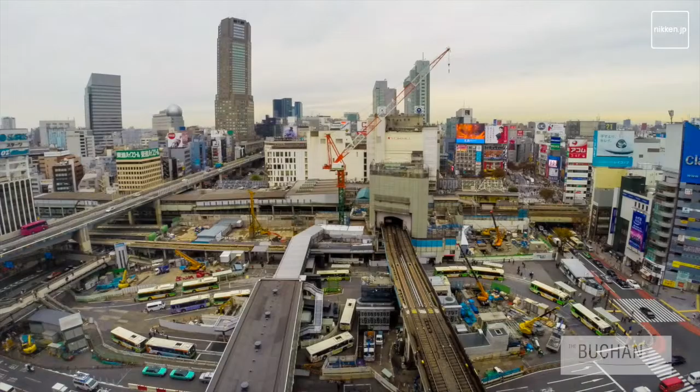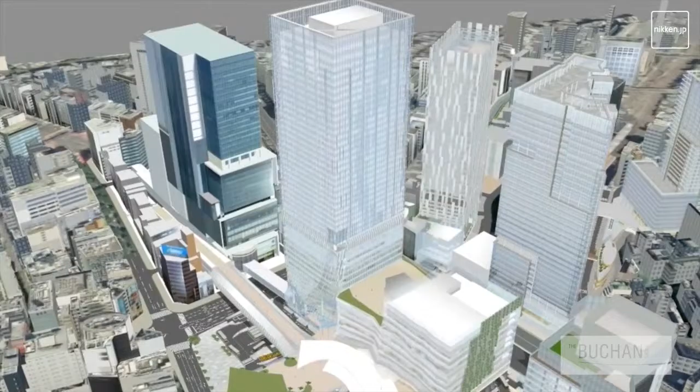Complicated topography that makes the land difficult to use, the disorderly streetscape, and the need to share the project concept among related people and reach consensus have become major challenges. In the vicinity of Shibuya Station, 5 districts centered on the station area will be developed one after another. This redevelopment project includes a high-rise building next to a huge urban plaza, crisscrossed with railways, roads, a river, and an underground shopping area.

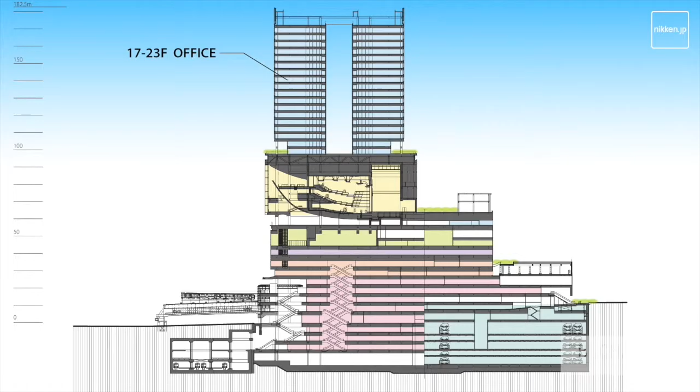Shibuya Hikarie is a facility that serves as a symbolic landmark. Shibuya Hikarie comprises a number of blocks, 17 stories of offices, a 2,000-seat musical theater, exhibition hall, and more than 200 shops and restaurants. By stacking these different blocks on top of each other, we have created a kind of vertical city.

Hikarie connects directly with Shibuya Station, which is one of the biggest stations in Tokyo. About 2.8 million passengers use this station each day. In front of the station, about 500,000, mostly young people, cross every day. In Shibuya, within a very small area, there are many different entertainment, office, and commercial facilities, as well as creative industries. The diversity of these elements has inspired the creation of a new subculture.

At nighttime, you can easily see the overall constitution of Hikarie and its bustling in-between spaces. Office and theater are located at higher levels so that a shower effect for retail and restaurants can be expected. Shibuya is located at the bottom of a valley built along the terrain. This is Shibuya Station, and here is Hikarie. There is a 30-meter vertical interval from the bottom to the top.

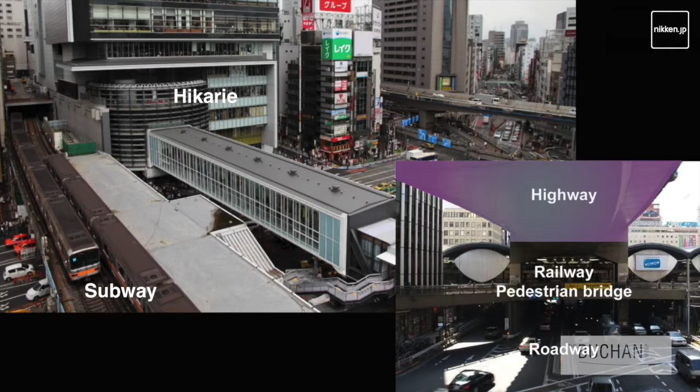The subway actually passes through Shibuya Station, 12 meters above ground. Also, a pedestrian bridge network, a raised railway, and an elevated highway all cross above the street. Shibuya Hikarie was planned in the middle of such an area. Hikarie is able to connect to various streets and rail lines at various levels. Just as there are many levels to access the building, there are many platforms to access the various functions.

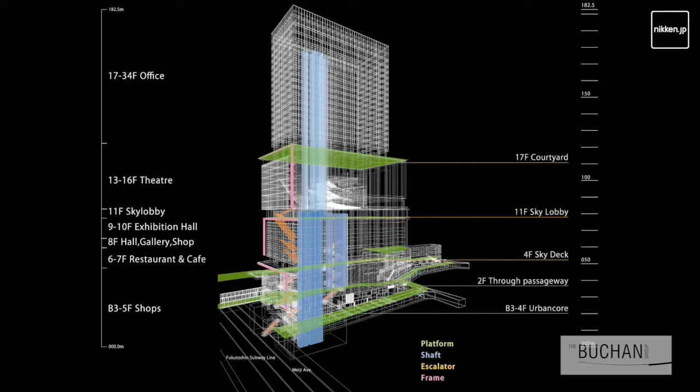This is the Sky Lobby on the 11th floor. You can see from this section that platforms are located in between blocks. These public spaces are planned at a variety of levels to create synergies through the diversity of users. The most important public space of Shibuya Hikarie is the urban core, which solves the complex flow lines of the streets, bridges, railways, and subways.

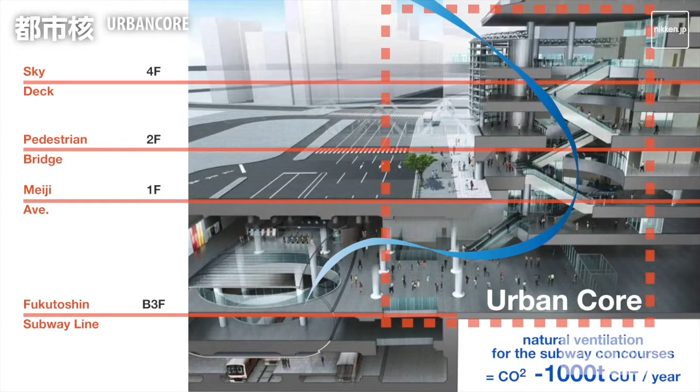The urban core is also a channel for natural ventilation, which reduces 1,000 tons of carbon dioxide load per year. Retail is arranged around the urban core, so the void space is very lively, and colorful, circular LED displays seem to float in the air, creating a very lively atmosphere.

This is the dynamic sky lobby on the 11th floor. There are 3 entrances, one for the offices, one for the Hikarie Hall, and the other for the 2,000-seat theater. We designed this floor so that users can interact freely. Floating above the sky lobby is part of the theater, built with aluminum slats. At night, it's lit with a variety of displays expressing the various faces of the city.

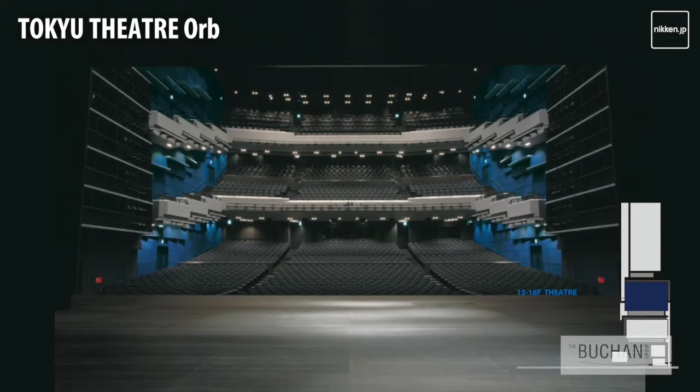This is the interior of the Tokyu Theatre Orb. The blue interior reflects its concept of being a theater in the sky, 100 meters above ground level. Shibuya Hikarie is a new challenge for mixed-use development. Although the technology for vehicles to fly over our heads has not yet been realized, Shibuya Hikarie is already prepared for them, with its many platforms at many levels.

Coming back to my presentation. Now we speak about Shibuya again. There are 5 major ongoing development projects in the Shibuya Station area, as we showed in the video. Before going into redevelopment detail, I will briefly explain the station renovation plans. This is the condition 5 years ago. Shibuya Station is a group of several stations.

The motivation of development was the station building in the center, which contained a department store and some structure of railway stations, which were almost 80 years old and were judged as non-resistant against earthquakes. So, the government and railway sectors decided to shift some stations to better locations and redevelop a new mixed-use development to maximize the value of railways and developments. This was the existing condition. Only the Hikarie project was completed, in the year 2012. This is the Hikarie portion.